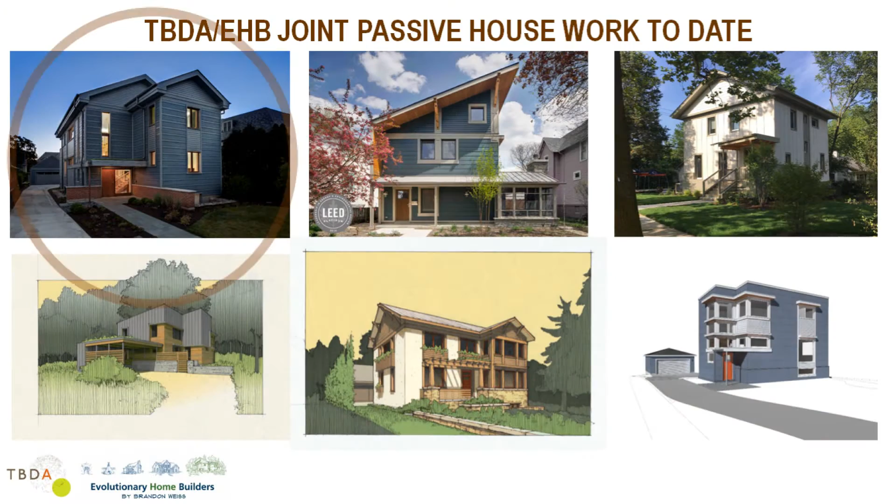And this is kind of the chronology of our houses. That's the ICF passive house we did. This is the one that was certified last year. Also, it was LEED Platinum, but we finished construction a year ago. This is in Hinsdale. That was on the tour last year. It came to Chicago, you saw that in framing. That just got pre-certified. This is about to go into certification in Geneva.

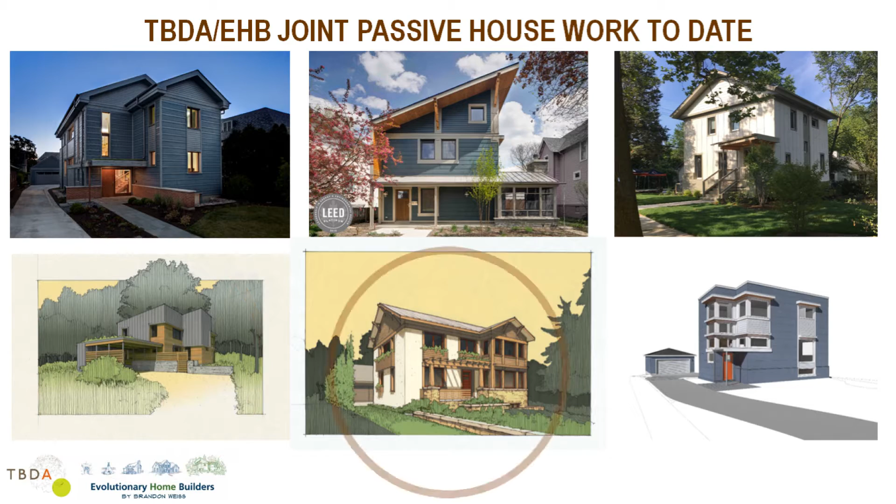And then this little house, which is actually not going for certification. That's sort of here are the ones that we're taking as case studies.

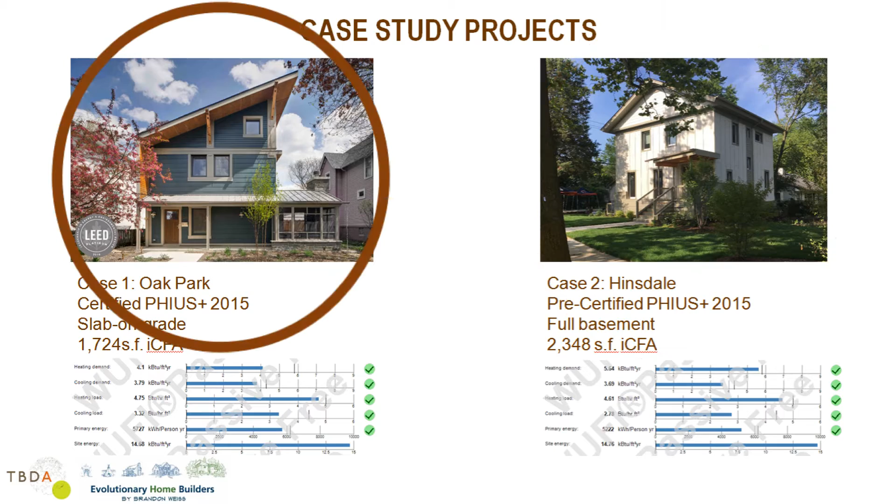Okay, so the one on the left, I'm really bad with left and right, is a slab-on-grade house. It's about 1724 ICFA, the interior conditioned floor area. The Hinsdale passive house has a full basement. We basically have bedrooms in the basement, 2 floors of living. There's 3 people living in this house and 6 in this house. We have pretty good occupant density.

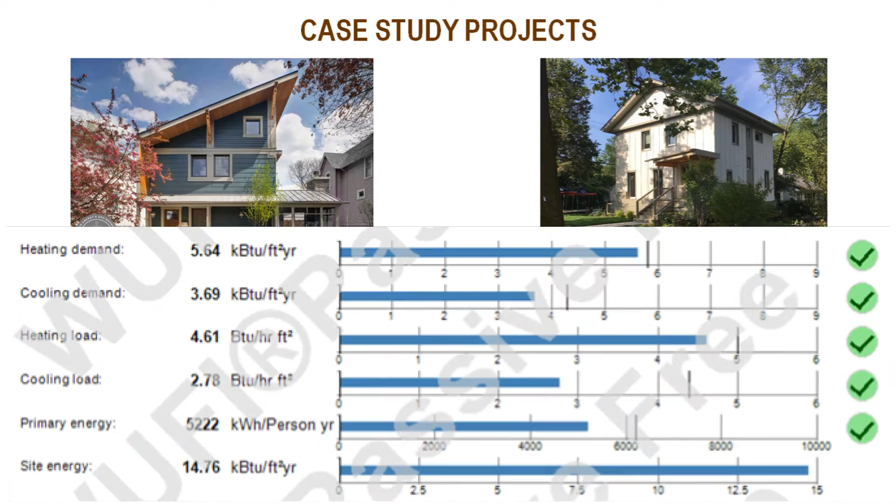And that really does play into kind of the certification and the way you look at primary energy now, as a per person basis. So these are our WUFI passive results. We did really well because we put a lot of insulation on. And we'll get to that in a minute.

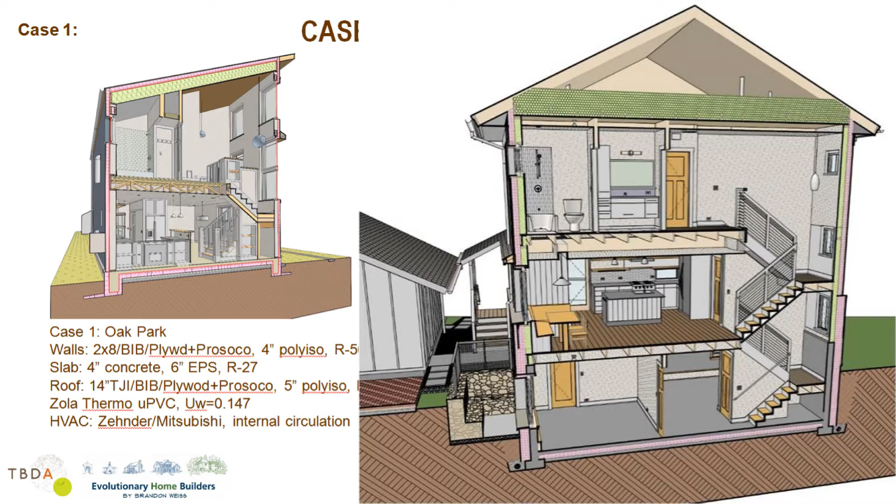I'm just going to say a few things briefly about this. This is coming from our ArchiCAD model. We're calling the Oak Park one, the slab on grade, case 1 throughout this study, and the Hinsdale house, case 2. You see we have our frost protected shallow foundation slab on grade for this guy, and clear spanning with open web trusses, deep, or I should say basement, full basement for the Hinsdale house so we can get the living space down. And I'll let Brandon sort of talk through that.

So on the first case, case 1, we looked at this and looked at probably 3 different wall assemblies when we were first kind of in schematic design. So after working together on the first project, we were kind of able to figure some things out and easily start some pricing on some early schematic sketches even before it was put in CAD or ArchiCAD.

So we looked at the cost impacts of having a basement versus doing a shallow frost-protected slab, and modified the wall assembly too, trying to find the sweet spot where we could hit the client's budget and goals, as well as our performance goals.

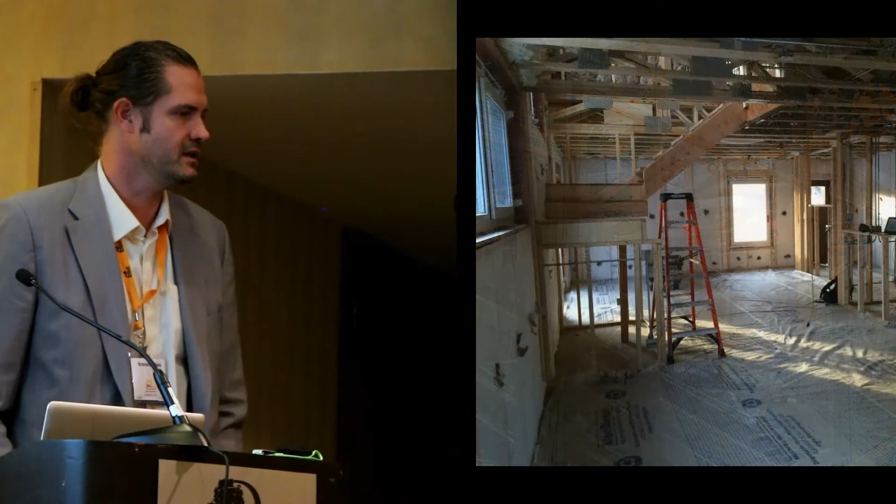So we ended up doing the frost-protected shallow slab. We did a 2x8 wall with bibs as the cavity insulation, then 4 inches of polyiso on the outside of that. We used plywood as our air tightness and sheathing layer.

Then we added the polyiso, and also put a house wrap on the outside as our main weather-resistant barrier. The roof was a monoslope roof, so we did 14-inch TJIs with bibs in them, then 5 inches of polyiso. We first did the Prosoco on the roof slope, covered it with 4 or 5 inches of polyiso in 2 layers, another layer of plywood, and then shingles.

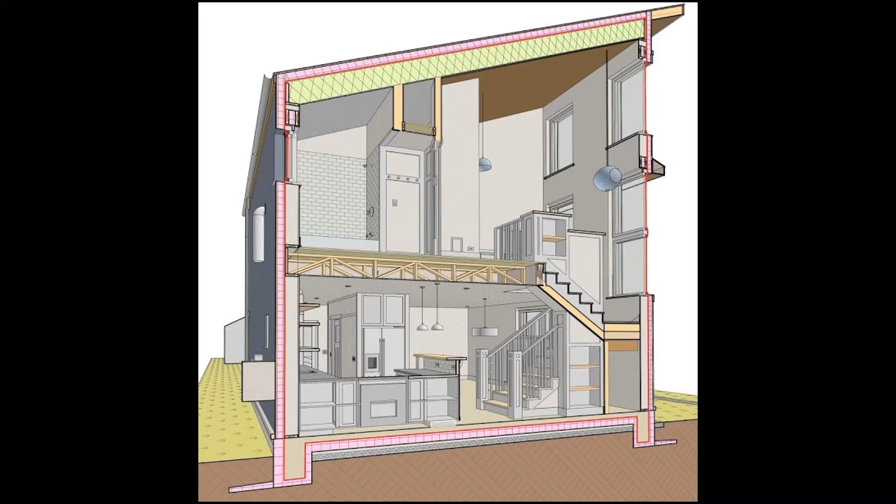So that ended up being that wall assembly.

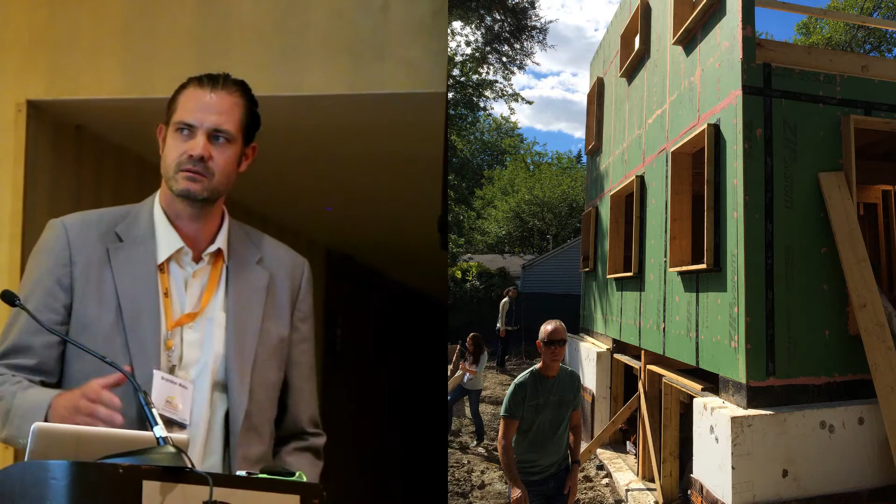On case 2, we had an early schematic design with living space in the attic and a dormer on the roof. We priced it out and went back to the client, and they wanted to bring the budget down a bit. So we looked at the opportunity of bringing the basement out of the ground a little more, finishing those rooms, putting bedrooms in the basement, and adding a larger window well connected to the outdoors, to see if we could bring the cost down.

We ended up finding that sweet spot early in the process, and ended up with a 2x6 wall. We used cellulose dense packed in these walls, netted and blew them in.

This site is right across the street from both the commuter rail and a freight rail, so we wanted to make sure we had better sound acoustical dampening there. We followed that with 5 inches of EPS on the outside of the wall.

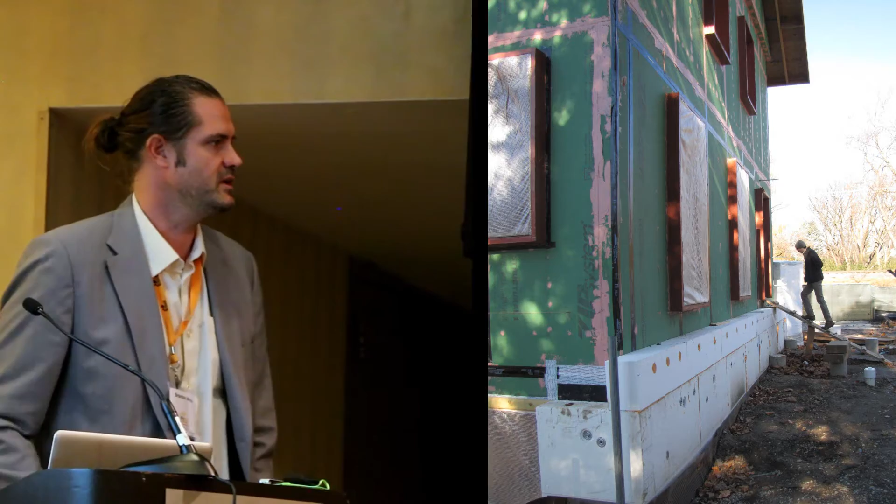The basement walls were concrete, with 10 inches of EPS on the outside. We actually kept the inside of the concrete walls exposed since all the insulation was on the outside. We did some board forming and used a unique pattern in the concrete to dress it up a little.

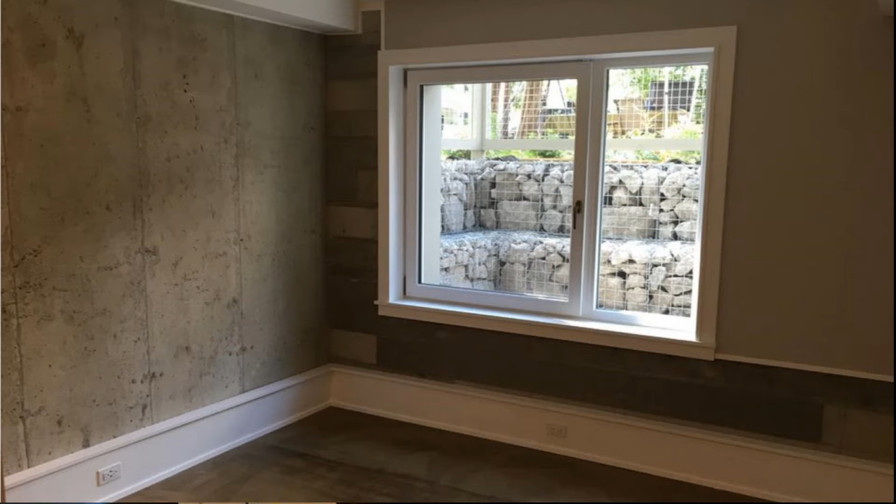When we did the tour there a couple months ago, people really liked it and got the sense that it wasn't really a basement, but more of a lower living room. It was a successful design that worked out well for us, and the clients loved it too.

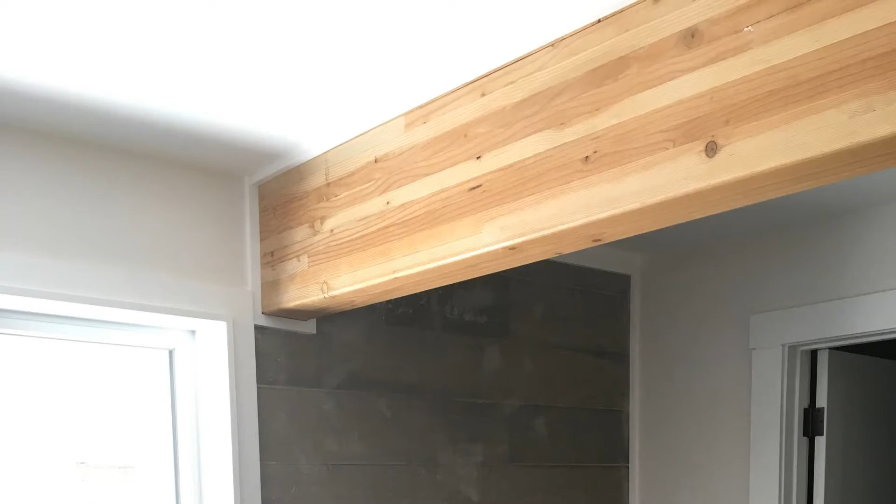Going up to the roof, we had 24 inches of cellulose in a ventilated attic essentially. We used zip sheathing for our ceiling lid and taped the seams as our air tightness layer, incorporated with the walls, which were also zip. We used joint and seam sealant there, and also taped some of it.

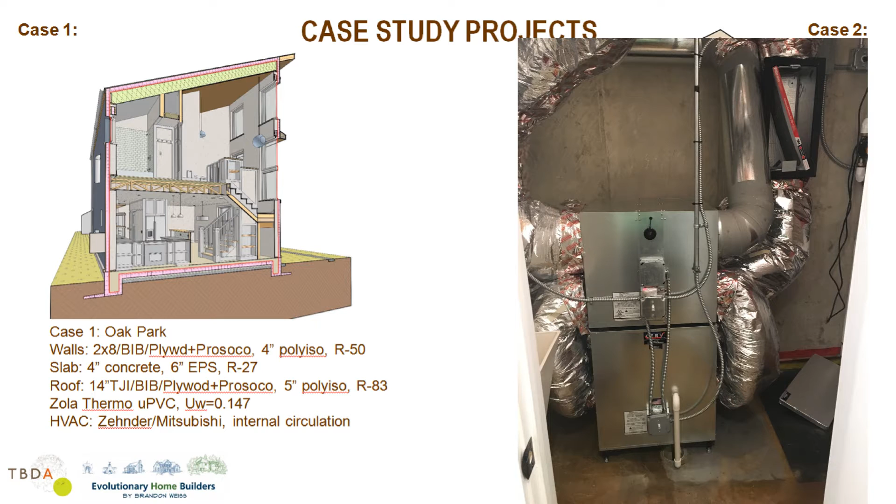For mechanicals, the first project had a Zehnder ERV with a single mini split, and the second project used a CERV for ventilation with 2 mini splits. So this is just a little bit of a sidebar here.

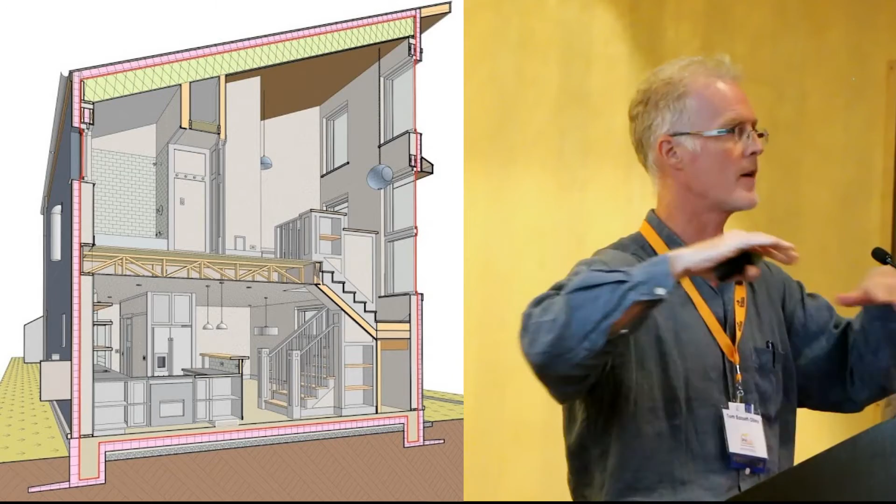We wound up punching the house full of holes a bit more to get more internal air circulation, using Panasonic WhisperGreen fans to pull air down, because I sloped the ceiling up to the south to create space for lofts along the south side. We only ended up putting one in the child's bedroom, which is a great little space for a bunk bed, a guitar, or whatever.

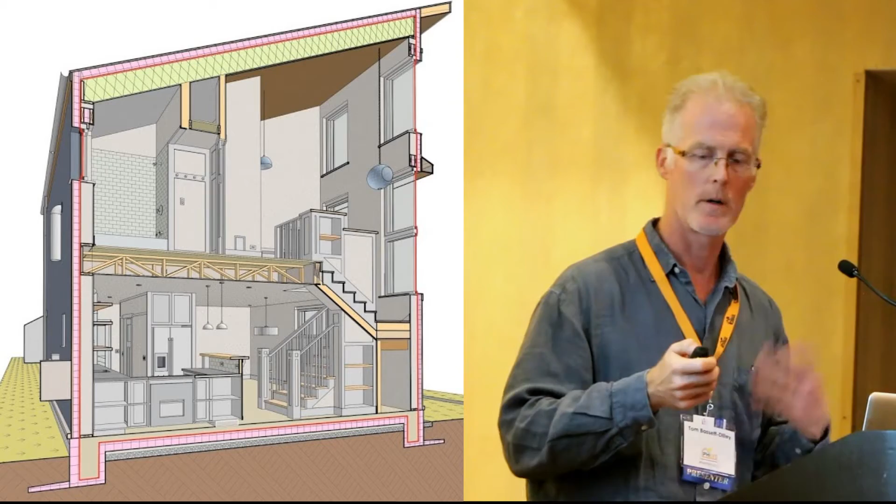That's the solar gain side, so we're open to the sun, but that also means stratification can really happen. We warned them about this with their daughter's loft, and talked about an internal air circulation layer, and potentially putting in some phase change material to dampen these heat loads. They said no, they'd live with it and see how it works.

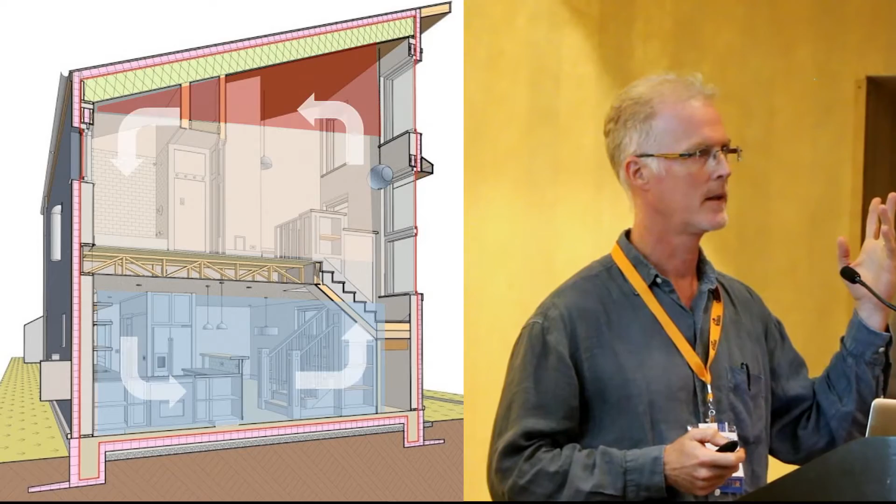So anyway, we came back and retrofitted an air circulation system. The more we go on with these things, the more we realize that because of the thermal spike you can get with solar gain in shoulder seasons, moving more air around is good.

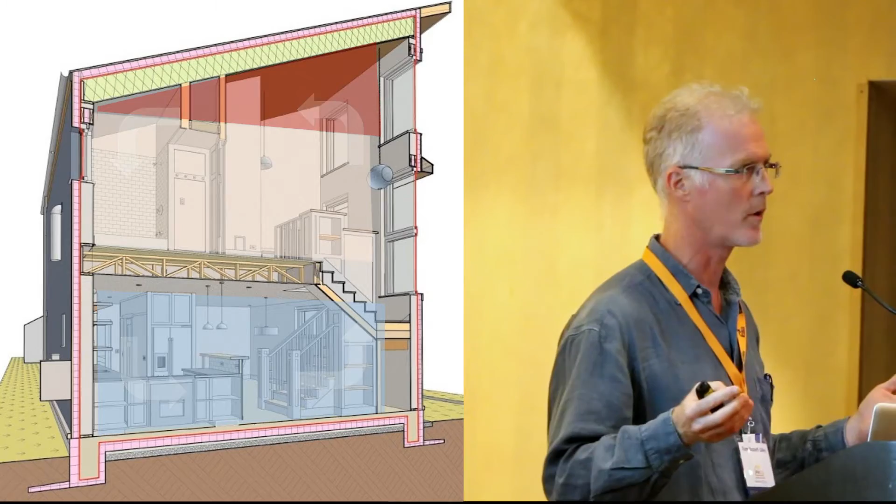And just doing a separate mini split with a very low flow of an ERV-only system isn't enough to move the air around and equalize it. So that was a big lesson learned for me, and the ERV now is moving a little more air around and doing some conditioning, so it takes some of that off. Air comes back to the stairway and rises through the middle, so it's just this big loop in the house.

Okay, so let's get into the cost issues here. How are we doing on time? 20 minutes? Okay, great, because this is really kind of what it's all about.

So again, case 1 over here, case 2 over here. This is a wall detail we drew early on. I'm showing the window conditions because a lot of it comes down to how you're going to deal with the window. This is our 2x8 wall with 4 inches of polyiso. In an early conversation with Brandon, we said let's put a 2x2 out there, which we can hit with nails for our trims around the windows, and still get good coverage over the UPVC frame of the Zola thermal window. But we wound up doing it with a plywood buck instead, so you'll see that plywood buck there.

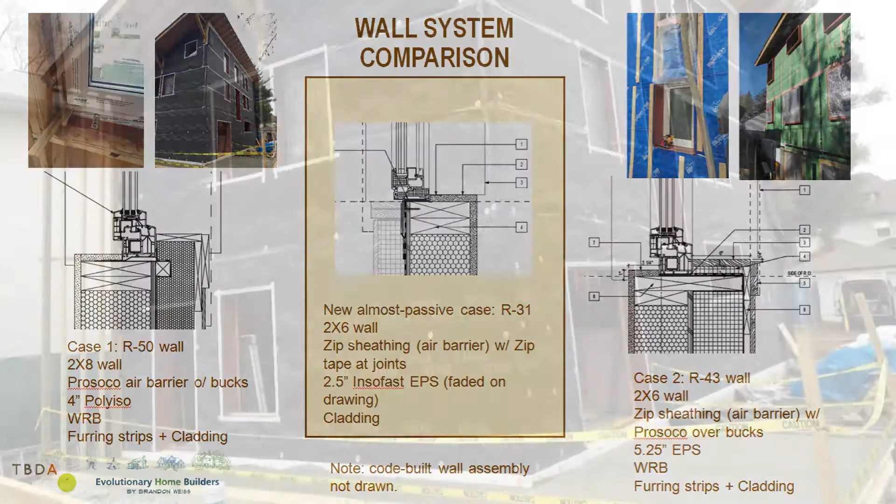That means that joint and seam has to come all the way around. This is our airtight barrier in the plywood, and then the WRB is out here on top of the foam on the outside, on top of the polyiso. So basically you have these two separate control layers, separated physically from each other.

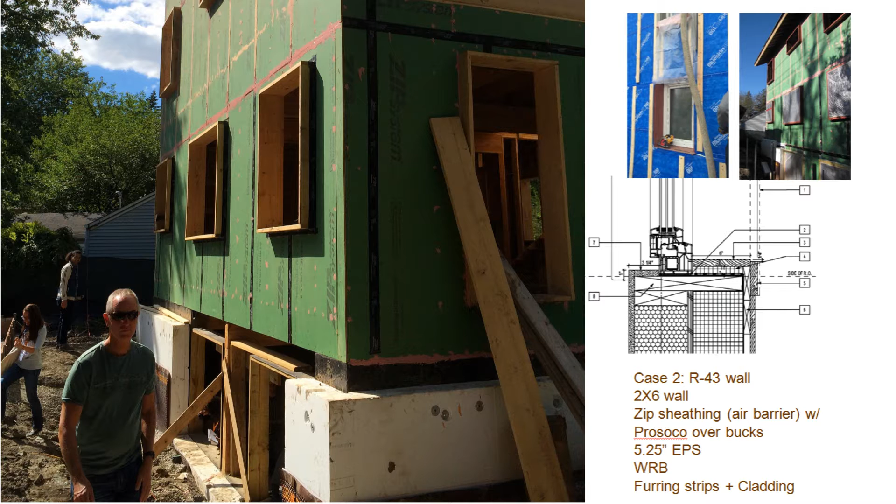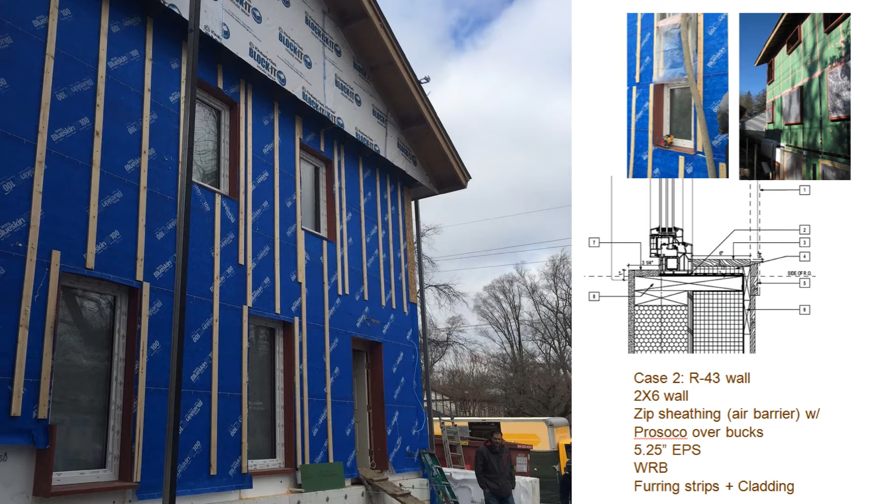So this is case 2, which is similar. We have zip sheathing here on the 2x6. The lead carpenter of the project said he wanted stronger bucks and didn't like the 3/4 inch bucks. So we framed the 2x6 wall, then framed the bucks with 2x12s, which stick out 5 1/4 inches beyond the sheathing. We have two layers of EPS to equal that 5 1/4 inches. Then again WRB, which in this case is the Henry Blueskin, an air barrier back at the zip, and then a WRB out in front of the insulation.

While this was happening, I had another project downstate that I couldn't get Brandon into—about 3.5 hours south. I was talking to the builder down there and showing these details, and he was freaking out, saying he couldn't get his guys to do it. His pulse was literally going up, and I said, okay, come on, we're going to figure out how to do this. This was a project where the owner really wanted net zero.

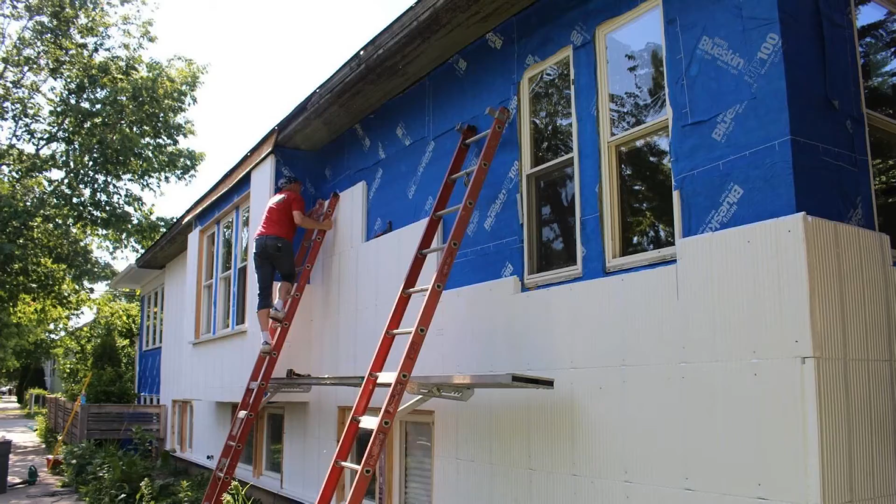So we're looking at the house, the energy model, and all this insulation we had, and we recently learned about this material called InSoFast. This almost-passive case is where we're looking at a single layer of InSoFast. If you don't know what that is, it's EPS with little plastic ribs in it—looks like half of an ICF form. The beauty of it is it's ribbed on both sides.

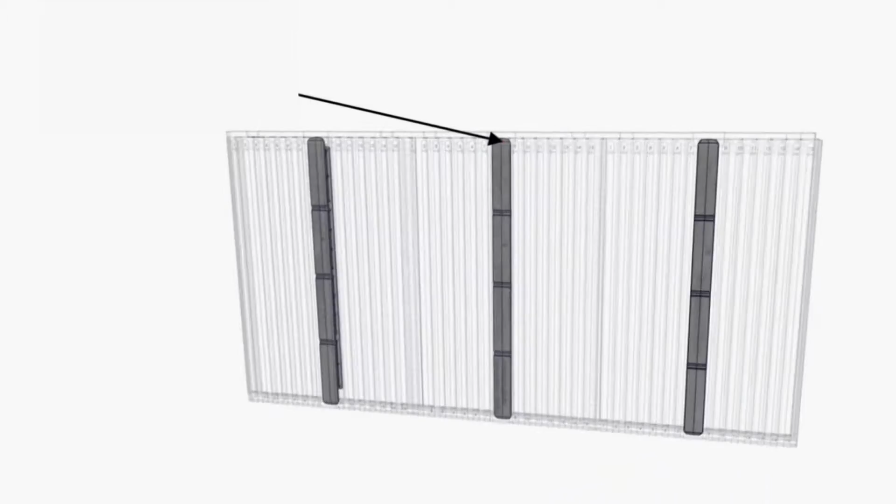So you can basically build a 2x6 wall, put your zip sheathing on it, and it's your air control layer and WRB in one, like in a conventional house without exterior insulation. That works because of the grooves on the backside of the InSoFast—it can drain there, and you flash at the bottom of it. You flash your windows to the zip, not out onto the buck. It simplifies how the whole series of control layers goes together.

This is where the InSoFast goes, it's sort of grayed out here. The thickest they have right now is 2.5 inches, so it's barely enough for our John Straube rule of thumb—1/3 to 2/3 condensation control—but we're there. We don't have to build these funky bucks; they can use regular nailing fins like they're used to. So when I brought this to the Springfield contractor, he calmed down and said, okay, we can do this, we can do this.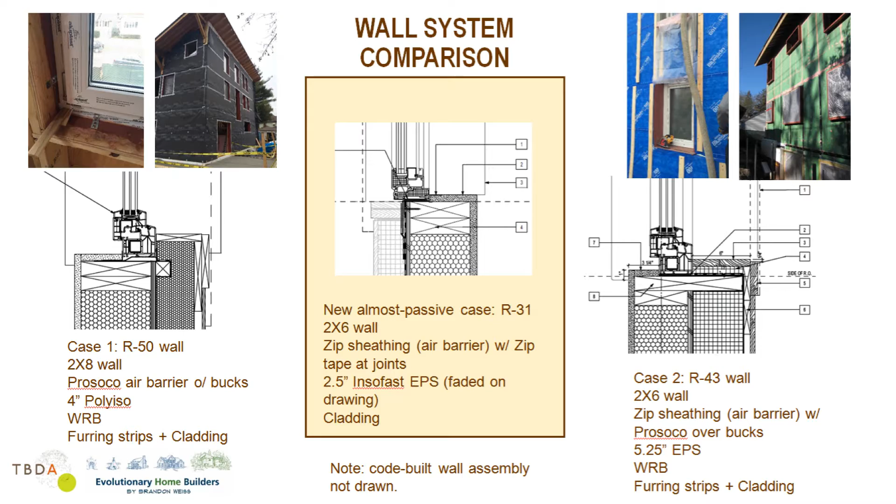So I went back to the WUFI Passive model and said, how much of a hit am I taking in the energy here? How many more PV panels am I going to have to put on this project to get it to net zero annually? And the answer was zero, because it made such a small movement in the energy, since we had these really efficient mini splits. So we're looking at the energy penalty, and it's negligible. And I'm thinking, uh-oh, this is scaring me a little bit about what this is going to tell me about my passive house energy standard. So we'll get to that.

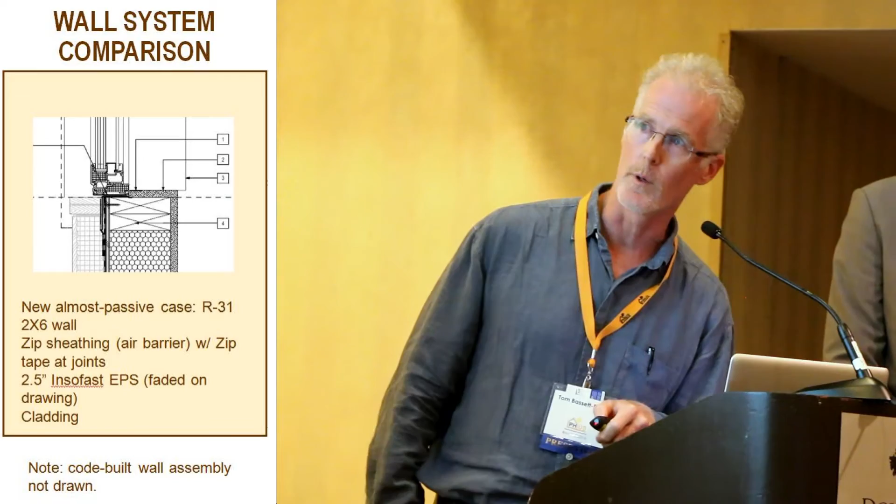Anyway, it's a pretty good wall. But you see, we went from R50 down to R31, and that's a big hit in your annual heat demand, and in your peak load as well, a little bit. But it was simpler to build, so I'm moving forward with that. I'm just thinking in the back of my head, what is this going to mean on projects? How much simpler and cheaper is that to build?

We should try this, we should practice it, figure it out. So we said, all right, let's take these two passive houses we built, and let's do a dialed down in-between level, this pretty good level, and let's do a code build level, and let's look at the cost. That's where Brandon stepped up and started running the numbers. Looking at the cost, we basically looked at the wall assembly, or the overall assembly of the home, the envelope, the windows, mechanical systems, and the InSoFast option.

We priced out the 2x6 wall versus the 2x8 wall. We did that instead of the bibs. The zip sheathing was our value engineering, or what we're going to price here, but the InSoFast was pretty new, so we were also able to price with the crews and make sure they could estimate the hours appropriately. Same roof and slab, we did shallow frost-protected slabs. To control condensation, we wanted to look at the same roof assembly. Same HVAC system for that option, middle case scenario, and the same windows.

And that total savings came to, for case 1, a $16,000 savings, and for case 2, a $7,200 savings. Case 2 is a more traditional gable roof with a flat ceiling.

And then we looked at code build, so this was something we've never done, but looking at how we had to look up the code book and see what the codes actually were to try to see what we were going to be pricing. So we decided we were going to go with the 2x6 R21 high density batt, no exterior wall insulation. For the roof, we did the 16-inch TJIs with the bibs again, but no exterior insulation. Now, looking at the energy implications, we know that's not good from a building science perspective, and there's durability issues involved with that, but we priced it as it was.

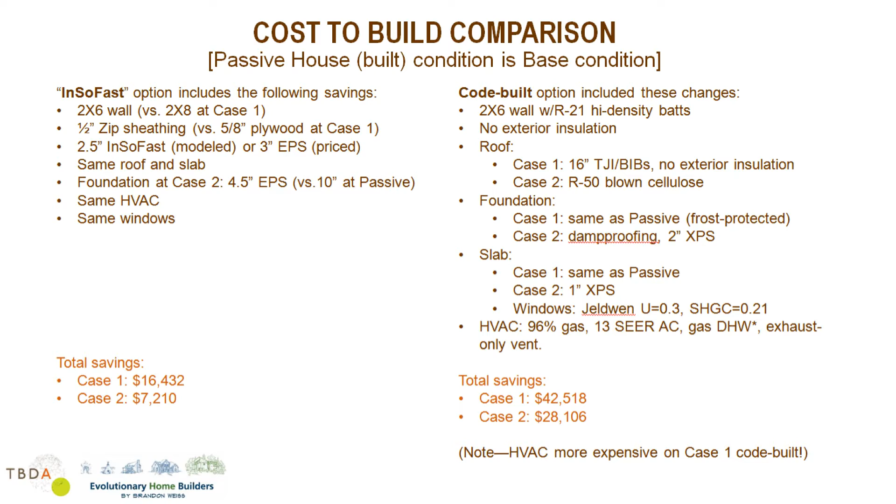And then case 2, we just looked at an R50 blown-in cellulose, just being the code there. And case study 2, we just looked at 1-inch XPS under the slab. Then for the windows, we just looked at kind of off-the-shelf, Menards-type windows. And then the mechanical system changed in the code build. We went to bringing in a natural gas furnace, a 13 SEER air conditioning unit, gas hot water, and exhaust-only ventilation. So just a pretty good house, but cost savings there.

Case 1 was $42,000, case 2 was $28,000. Without knowing, the next slide we'll get into actual dollars, or percentages versus dollars.

Yeah, and I have to say, these numbers kind of surprised me, that they were so different from case 1 and case 2. But I think what happened is in case 2, we've really figured out a system that's relatively inexpensive to build, so we're not going to have huge savings off of that because we've kind of worked some kinks out. But case 1 was a more expensive house to build. Structurally, the non-vented roof, the shallow frost-protected foundation maybe? Yeah, so anyway, I think we're getting more benefit there.

So, okay, we are at a Passive House conference, there have to be some graphs. This was looking at the energy, the total yearly energy for each of these houses. How much does it change when we shift our insulation? And where does it shift? Okay, so the orange is the space conditioning, the blue is cooling.

Miscellaneous energy, so this is our plug loads and lighting, we've lumped those together here because they don't change that much, that's the yellow, okay? And the dark blue is ventilation, and in the code built case, we just threw ventilation into the miscellaneous electric because it's not a continuous thing.

So what we found is that, yes, the energy demand goes up, but not proportional to the drop in insulation. Going from R50 to R30 on the walls doesn't make a similar bump in the energy. So the InSoFast approach on case 1 really only bumped us up about 13% in total energy over the course of the year.

You go down to the code level, though, we're talking about 150%, so it's really a major difference. In the next slide, we'll look at what this means in terms of dollars if you're operating this, because that's really where we want to get to. That's what an owner thinks about, not so much kilowatts and BTUs.

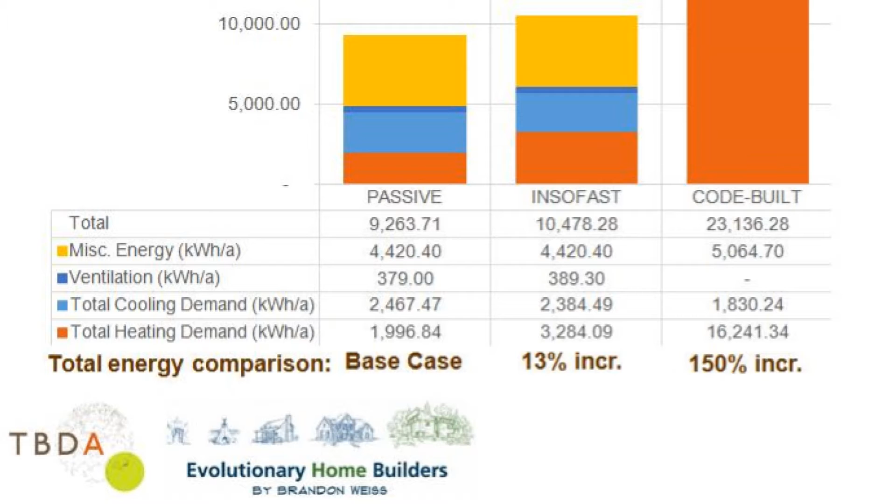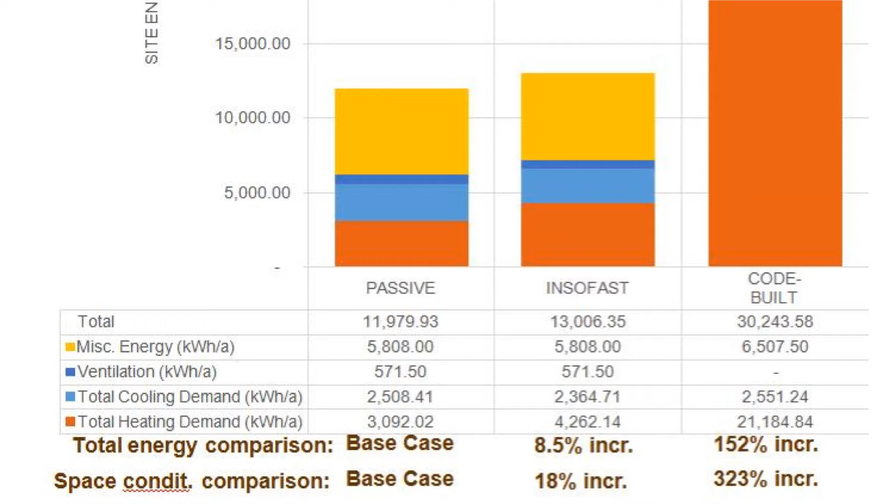There's some really interesting things I'm seeing when I started looking at these numbers. One thing that really surprised me is that the cooling load is the least on the code built house in our plan. Michael's nodding his head.

It's like, yeah, you model a few of these, you realize that in the summertime, you've got all these internal loads. You got all these people and all this electricity being used, and you're holding it all inside, keeping the energy inside. Well, in the summertime, it's not really working for us. We still have some solar gains, no matter how well we're shaded, just from radiant. So the cooling is a little bit of there, but obviously it's not moving enough to offset a huge increase in heating.

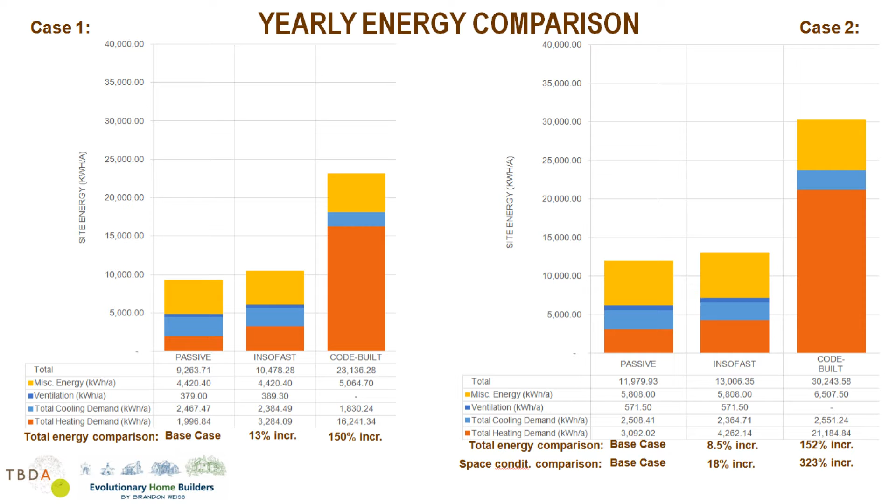Is that the temperature delta in your winter is huge? It's very cold in Chicago, right? Very cold in Chicago, and it's hot and humid in the summer.

What's the time frame for these dollar amounts? This is for a year, is that what you mean? Yeah, this is just one year of running the house.

$1,000 a month. Well, okay, let's look at that. So what did you use to model those? We use WUFI Passive for all the energy. And that was actually a question on my mind, is when you dial all the way back to code built, is it throwing off your results a little bit? I don't know. So we put that together, yearly cost, just using a mortgage calculator online at a 4% mortgage and a 13 cent per kilowatt hour electricity cost.

And we didn't include any increase in costs over this 30-year time. This is like as if energy costs were just frozen.

What we kind of intuitively thought was going on with building to the PassiveHouse level is kind of playing out here, that it's almost a wash. You can build to code and have a really cruddy house and pay the energy company more, or you can build a really good house and have a little higher mortgage, right?

Now the difference in actual numbers here, on case 1, we're going from $35,572 yearly cost down to $34,794 for the InSoFast option. The pretty good option is actually the least cost of ownership of all these, at $34,794. But they're so darn close.

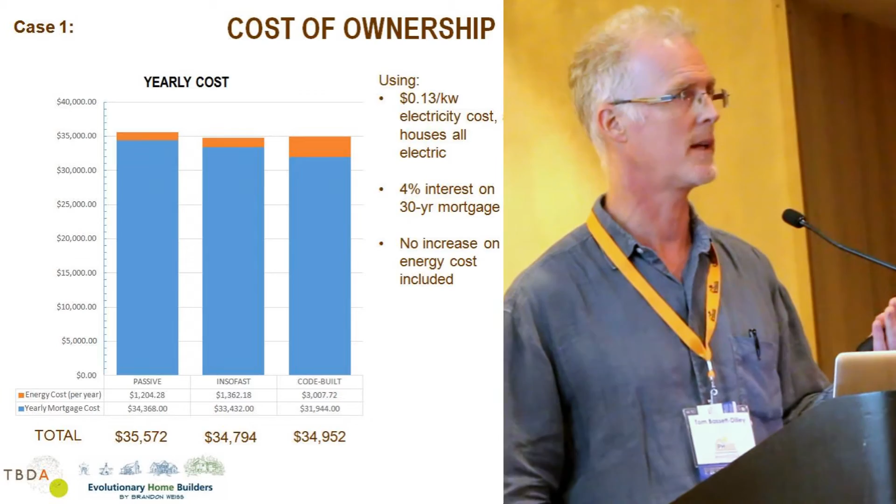And what does this middle one not have? It doesn't have a certification. You can't certify to this middle level, right? I mean, and I think that's really important. Everybody sitting here understands that. Because, you know, it's one thing to say, yeah, I think we did, but it's another thing to have it actually certified.

And what's your base code on right now? 2015 IECC. Yeah, exactly. Illinois, for all of its political stuckness, has been adopting the IECC.

The code built is a little more expensive to own and operate than the in-between version. Now, on case 2, it's interesting, PassiveHouse is the least expensive to own and operate over the course of a year. I love that, and this is a 4% delta. This house is 7% more expensive to build passive than code built.

But InSoFast is the lower number. I'm sorry, yeah, I did that dyslexic kind of thing. By about $300 a year, beer money, right? I mean, really, that's what I mean, it's a wash.

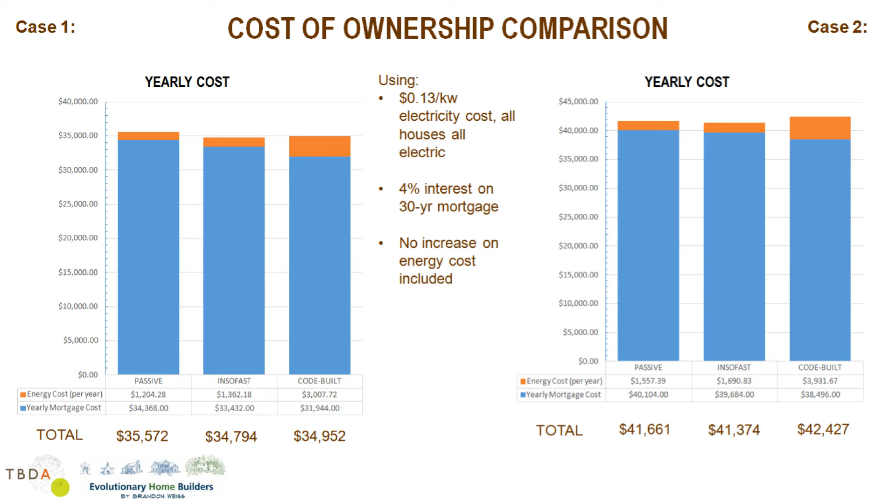I don't know how many people this would stun. These are people who, when we get into value engineering, and we put this screen porch with a masonry fireplace on it that they fell in love with, and they said the budget's too high, we gotta cut this out. I say, okay, I hate to ask this, but should we get rid of the screen porch and the fireplace? No, we gotta keep that.

So this is what I mean. It's like, what do you believe in? Do you believe in having a healthy, well-ventilated, comfortable house that's gonna last a long time? It's interesting, whenever Brandon talks about this, it's always durability and health. And the durability thing, like what you said just now, I never heard you say it, like you're always gonna have durability issues with a code-built house. It's like, wow, yeah. So anyway, there's a lot of reasons, but it's so darn close.

And the code-built house is actually more expensive to own and operate. You're paying so much in energy bills. So I'm going, wow, this is really interesting.

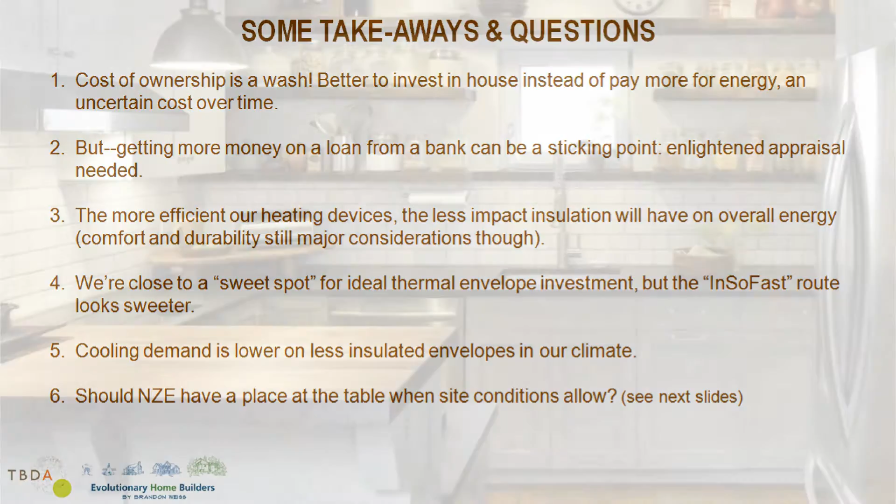I guess the big point for us was that a lot of people would say, okay, you're gonna ask me to spend 5, 6, 7% more on this house. How long is it gonna take me to pay that off in my energy savings? And we say, no, it's your cost of ownership. It's cash flow neutral, virtually.

You account for maintenance or any variation in maintenance costs? No, we talked about that, and it's a good question, really, because again, the durability question - that's another good reason to build high performance. It's going to have less maintenance costs. I think that's the next evolution of what the numbers we'll get over time, and see what that is, and figure out what the maintenance could be assumed for code build.

Part of the problem with the building industry at a code level is people have windows that leak in the first 8 years of their occupancy in a home, and that's acceptable to them. It's just par for the course. It's what their friends talk about.

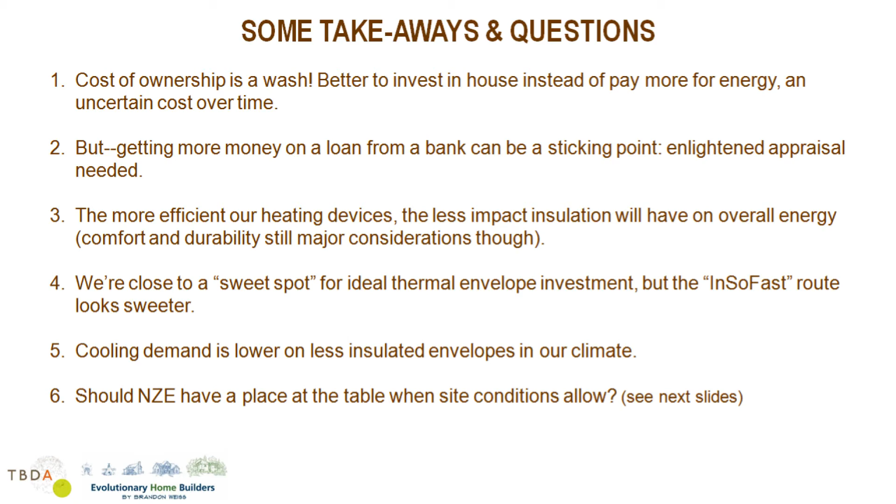Comfort, and condensation control, not for energy so much. So we're close to a sweet spot for thermal envelope, just like the PHIUS+ adaptation thing was all about. But the InSoFast looks a little sweeter. But again, that middle road, there's no certification to it.

So, okay, so should net zero energy have a place at the table when you're in this kind of situation, and maybe your certification is going to be living building net zero or something like that?

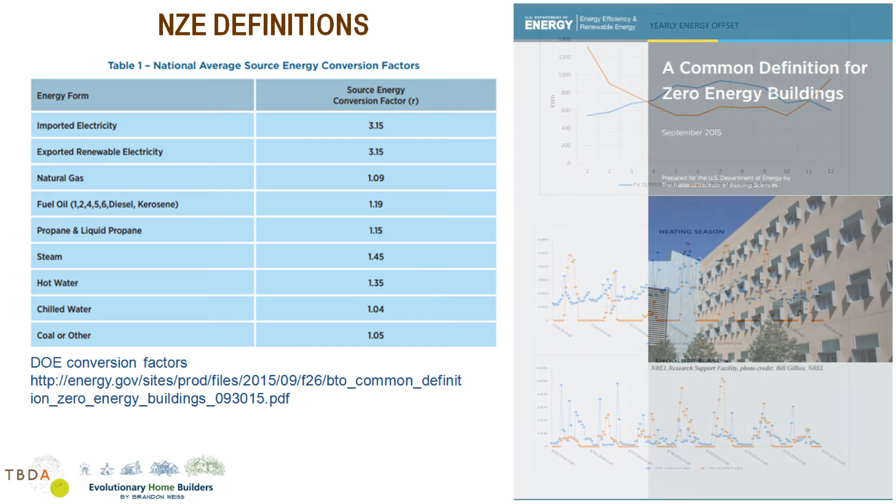We started looking at the definitions of this, and initially I was thinking about, okay, primary energy, site energy. We know there's this factor of 3.15 according to DOE, 3.16, what we're using here in PHIUS. Thinking, all right, gosh, we have that energy factor because you got to extract the fuel, you have to make the energy, there's a loss of efficiency, there's line losses as it comes to you use it. So that's why the 3.16.

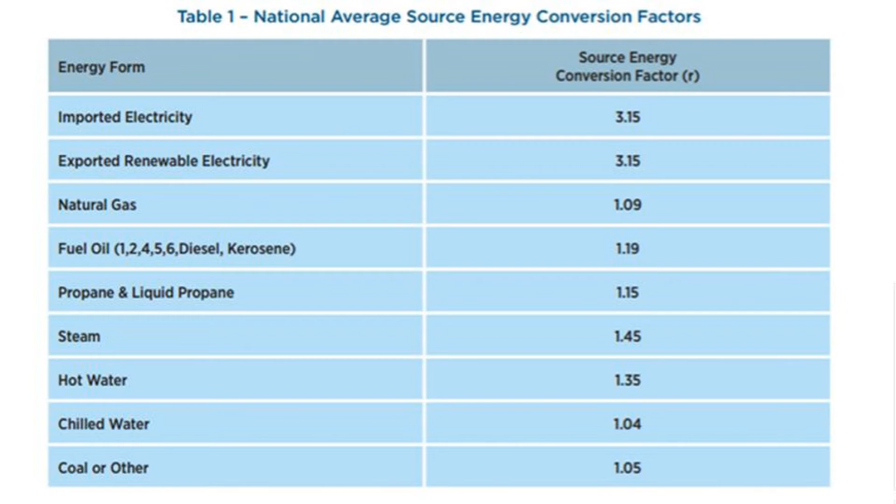And so I'm making PV in my roof, and now it's going to go out, but I looked at this DOE definition, they're saying exported renewable energy is the exact same factor. I was like, well, oh yeah, right. It doesn't go back into the ground and then back to the plant and come back. It just goes into the grid. It buffers the grid. So it's just lessening the load around.

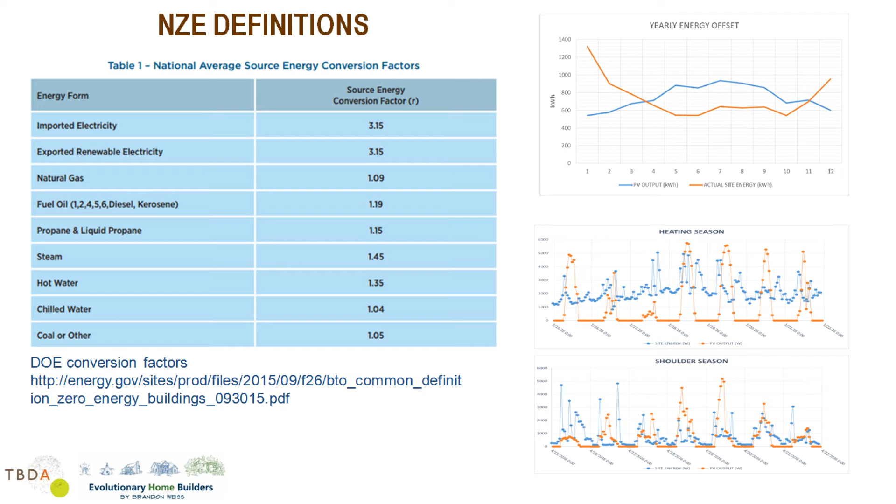Now, so we had started looking at our monitored data. The case 1, we've got an energy monitoring. We've got a year of data. It's just fantastic. The blue is the PV output. Orange is when we need our energy, just like one of those.

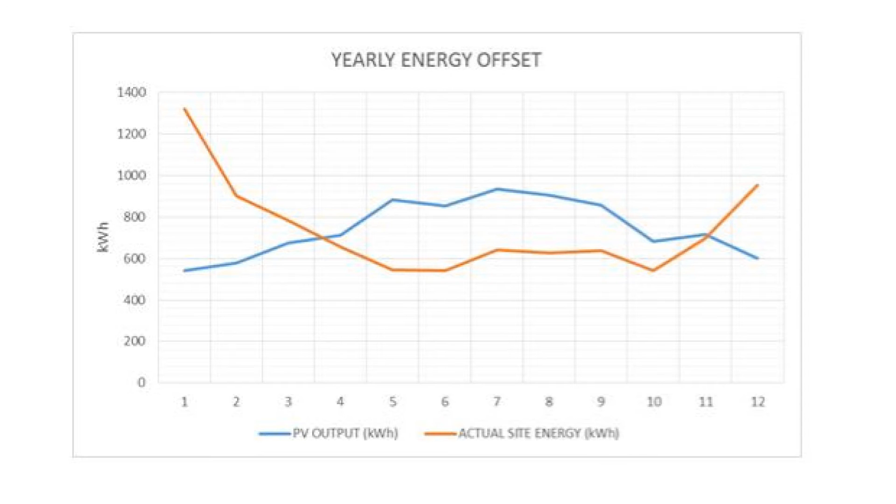And so, you know, we're making more in the summer than we're using, in the summer than we're using, and we're making less in the winter. But I was thinking, because of this primary energy going back and forth, we were going to have to start calculating for the heating season, and the cooling season, the shoulder season.

But anyway, I looked at that and went, okay, this is simple. We can just basically count what's going out the same as what's coming in.

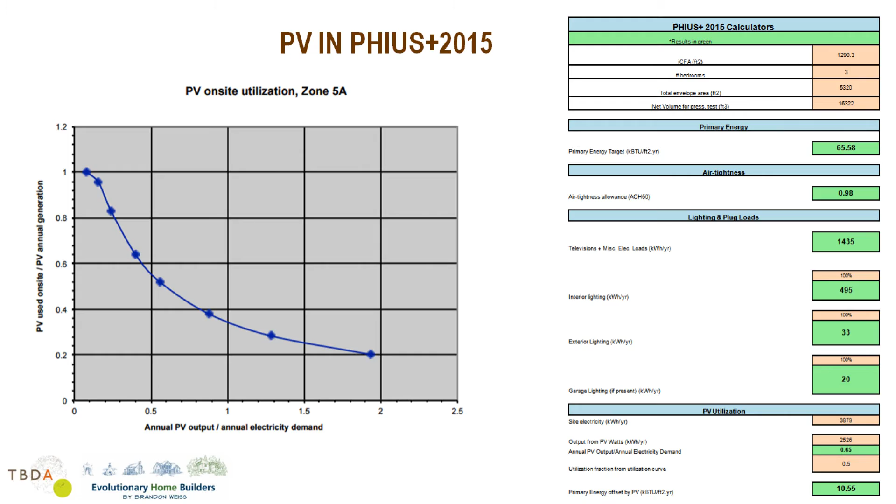Now, I should mention, as Brian, who reviewed my paper, said, well, no, that's not how PHIUS looks at it. PHIUS, you can't just offset all your energy to get to your primary energy factor with PV. It counts, but in a diminishing return - the more you put on, the less it counts against your primary energy. But you're still making energy in the world. So there's a sort of DOE definition and how you look at really annual net zero, and then there's certification.

So they're a little bit different, but we wanted to look at what the cost would be to take these 3 different levels of houses to net zero. A lot of people like to hook onto that concept. It basically came out kind of almost the same.

Interesting, what we did is we assumed 4,000 a kilowatt installed. We were figuring 345 watts per panel, which is a pretty high output, but we tend to want to use fairly high output so they can fit in array on a roof. So for case 1, we found that we needed a 6.05 kilowatt array. That took 18 panels. If we dialed it down to the PHIUS level, we were at 6.3 kilowatts, still 18 panels. We're in just this little change here.

For the code-built house, we need 74 panels. And so there's just no way. And so expense-wise, again, there's our sweet spot. Code-built is like another 50 grand more. But who's going to try to take a code-built house and take it to net zero? Some people might. I mean, I don't know. It's crazy.

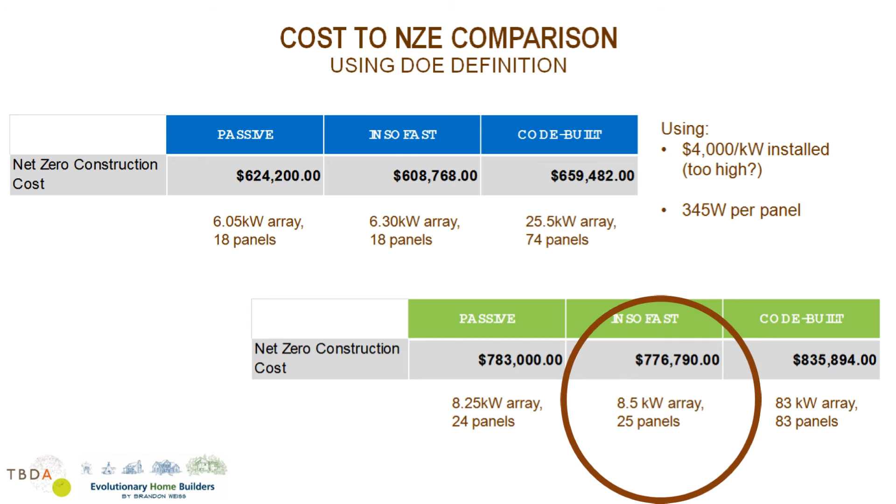And then similar results on case 2. We had to go from 24 panels to 25 panels to get there. And by the way, these houses that we're building, they're always pre-wired for PV. We have yet to install a PV array. But what the funny thing was, I couldn't resist doing this, is like, what do those arrays look like on the roof?

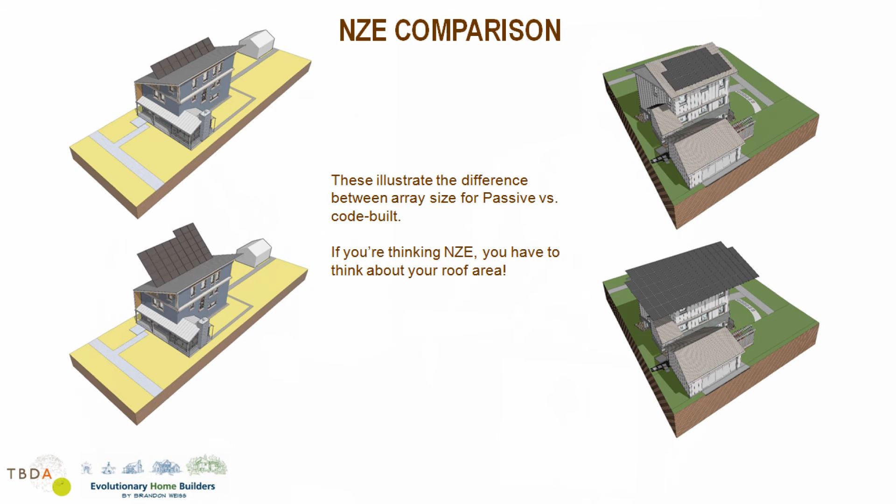So this is our Bullitt Center, you know, for all the wrong reasons. But this is actually not, this is only 40 something, we actually need 70, so this would be like out to here. But that's real, that's how many panels we'd actually need on that Hinsdale house for a family of 6 to go annual net zero.

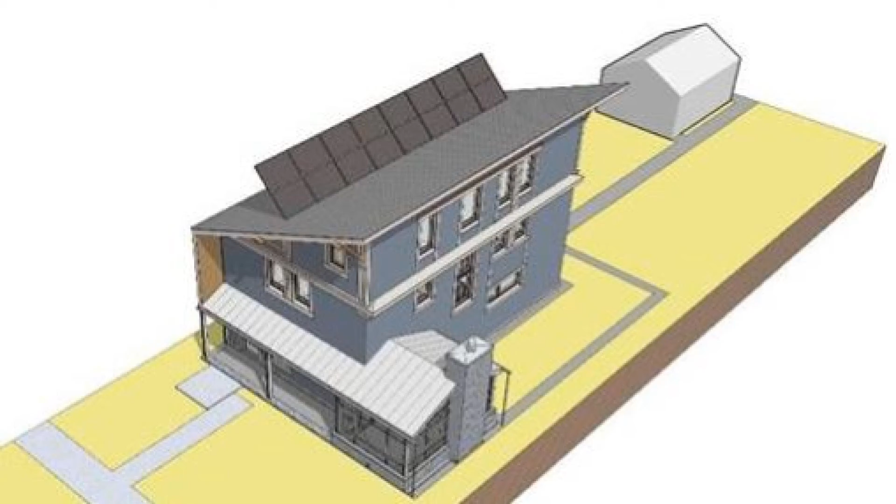Take the energy over time into account and the life cycle costing too, yeah. I just did a quick Google search on the maintenance cost. It's 1% per year, so a $300,000 house is $3,000. And they said you really should account for it. Over the life of that 30-year mortgage, it's 27% of your principal and interest. Wow, it's a big number.

And the thing is, this is not like a production home builder versus what we're doing. This is like if we did it, so we figured there would be relatively comparable design costs. There's not a huge delta for us to do PassiveHouse. We do it pretty quickly, so it's not like it's a huge time thing for the owner.

Not completely fair because you have a top-notch building. Right. But I'd actually charge more for the code building, so I cover my warranty costs.

Yeah, it was really quality of space that I was after, getting some light. In a mid-block house, urban house, I've been sort of heading down this road of biophilic design, sort of from intuitive, and what I was realizing there was that you need to have a vista, you need to have a sense of connection to something natural. You can look out the back to your neighbor or out the front to your neighbor and your view stops. But we had this set with the stair as always an opportunity for the space to open up. So I realized that if we lifted the space there, you could have this great view to the sky. The sky in the Midwest is so beautiful. It changes all the time.